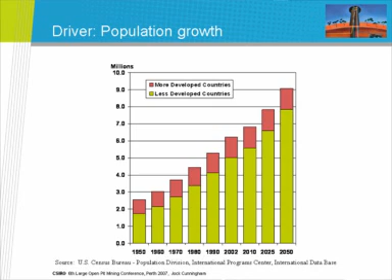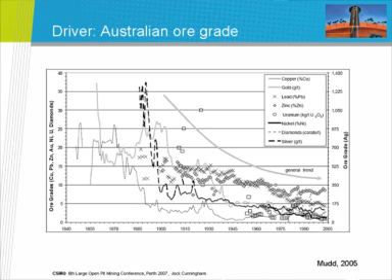Both speakers this morning mentioned some of the drivers for advanced technology and why we need to improve the industry and adopt new technology. Population growth, just putting some data behind some of those suggestions. It's well known out there. Australian minerals production is increasing somewhat exponentially over a long period of time, while at the same time the grade of our ore that we're mining is decreasing. Waste rock is also increasing.

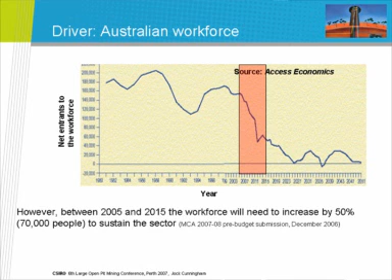And on top of that, the net increase of workers to Australia's workforce is on a gradual decline over years. In fact, somewhere around 2027, maybe we'll start hitting a zero net increase in population growth. According to the Minerals Council of Australia, somewhere between 2005 and 2015, we'll actually need a net increase by 50% in the workforce for the mining industry, equating to about 70,000 people in all.

Safety is another one of those drivers. You can see plotted up on the top left-hand corner there, the lost time injuries is gradually decreasing over time. On the right-hand side, you can see the fatalities decreasing over time as well. Fewer numbers, obviously, of those, which explains the high variation in the rate from year to year.

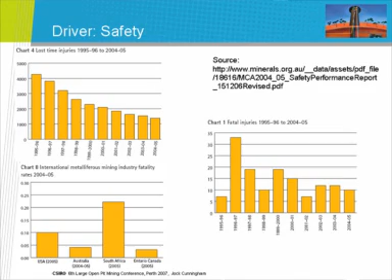Internationally, though, Australia is doing reasonably well. You can see roughly on par with Canada in a global sense. On the other hand, these trends are slowly reaching a plateau, and maybe it'll be very difficult to move beyond that and to improve safety even further without some significant change in the way that we mine.

At the same time, we'll have new challenges. Automated trucks will be introduced over time. Currently operating 5 trucks, Komatsu trucks, the Modular Mining guidance system in Antofagasta in northern Chile. So as discussions are underway and as we think about applying those in Australia, these will bring with it greater safety challenges that we need to respond to.

Fortunately, though, over time, legislation has changed and we've moved towards a risk-managed regulatory environment. This means that we will take lots of care over the introduction of these systems and think very carefully about how we can isolate manual from automated traffic in these situations.

We need to make sure, and I have to be very careful how I say this, but we need to make sure that the introduction of remote control in underground mining doesn't result in injuries and fatalities when we do get around to installing those systems.

With remote control of loaders, for example, this was actually introduced to improve the safety, to stop people getting injured if they took an LHD into an open stope in unsupported ground. We told people to stay away from them. We even suggested perhaps that people stand on a pile of dirt or on a barricade or behind a wall to protect themselves. But these were really procedural type controls, and people were injured and killed, unfortunately, in that introduction.

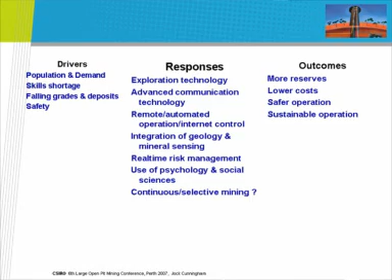One of the other areas that we'll see coming through, in fact it's happening now, is the introduction of other skill sets from other sectors of the industry, and these include perhaps psychology, social sciences, and if we're going to remote control equipment well beyond line of sight, perhaps thousands of kilometres away or around the globe through the internet, then we'll need to address some of the other issues that will be brought to the fore in that process. For example, operators can't see, feel, touch, and the psychologists will help us figure out what types of sensors, what types of input, what types of feedback will be required so that operators can handle that challenge.

Continuous selective mining. Well, this is a question, and we'll come to that a little further on. And of course, the outcomes will be to address some of those drivers that we talked about.

Just looking at the automation response, there has been a recent surge in the desire for automation among the mining industry, however the present focus is to automate and remote control existing operations. This is a type of retrofit. This is now being applied to LHDs, draglines, loaders, trucks, dozers, graders, all sorts of pieces of heavy equipment. Drills, of course, as well, and systems are being developed around the world to improve remote control of drilling, sensing while drilling, blast drilling, and also exploration drilling.

This brings some benefits: smooth and programmed operation of equipment. If something is automated, semi-automated, or operator-assisted, then you can program the operating envelope for the equipment, and it will, short of something going drastically wrong, stay within that operating envelope and reduce maintenance on tyres and equipment damage and all the rest of those sorts of things. Of course, that'll improve safety as well.

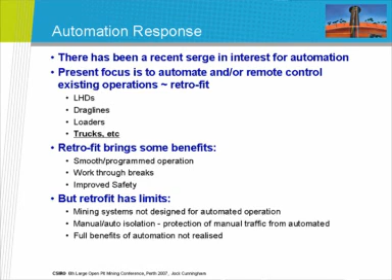But retrofitting has some limits. Mining systems are not designed for automated operation. Manual and automated, people need to be separated from these operations, and at this stage, unless you can protect the whole area, isolate an area, then there are no fail-safe systems to keep operators separate from automated machines. So the full benefit of automation won't be realised, I think, until we can actually automate the complete cycle and integrate a number of these technologies.

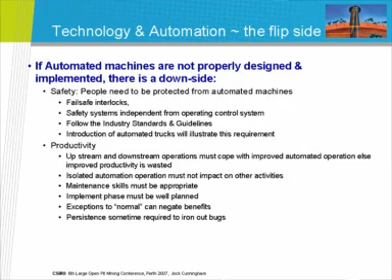We talked about protecting people for safety. A lot of devices out there are really used to guide operators and to remind operators that perhaps there's an issue about to come about. Maybe two pieces of equipment are moving close together. A number of technologies are out there that will constantly search for and detect when they find something. This includes radar, scanning lasers, RF beacons and the like.

But they have a fundamental problem in fail-safeness, because fail-safeness in a practical factory-type automation requires a signal to be received constantly and checked constantly, and when that signal is lost, then an alarm is raised. Some of these other types of technologies, which are probably really the only practical thing to do at the moment, don't fall into that purely fail-safe category. There is a desire out there in the industry, and Rio Tinto's desire has been published.

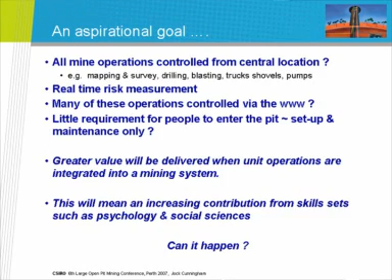They are looking for applying advanced technologies to remote control as much of their operation as they can. It's no secret now, that's out in the news across the industry. Many of these operations can now be controlled by the web, and we've seen examples of that. So what we are seeing now is a greater increase in contribution from a large range of skill sets.

Bob Adam mentioned to me this morning, when he was talking to a colleague of his about in-pit crushing, that apparently the colleague said, gee, open-pit mining's starting to get like longwall operation. And I said, well, strange you should mention that. Recently, over the last couple of years now, automation of longwall operation has been very successful, installed and run for 18 months at one mine at Beltana in New South Wales, now being installed in 2 Queensland mines in various stages of development.

I want to show you this, because firstly it's a very complex environment, very difficult. The electronics, all of the technology, not only does it have to work, it has to be intrinsically safe or enclosed in special housings. But this is an example of a remote control mining method via the internet, provided the mine operators allow researchers to operate the thing from a remote site. And I can assure you they probably won't do that, but it's certainly capable of that type of operation.

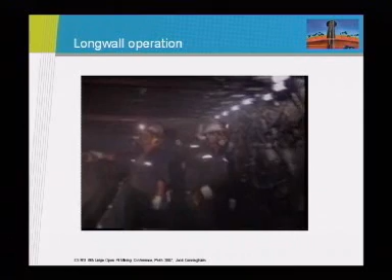It's also an example of geologically guided mining machines, something else we're looking at applying now in the hard rock area. So it's got integrated geology and spatial sensors to provide an intelligent mining system. I'm not sure if you can see it. It's a little bit of a dark image, but that's the way it is underground in a coal mine. But you can see how intense, how crowded and how hazardous underground coal mining can be.

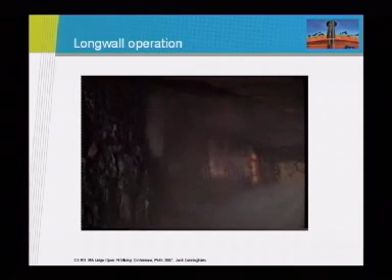You saw a flash of the shearer on one side. You can see the chocks above moving and pushing the shearer and the chain conveyor forward, advancing it through the mine, and while at the same time people are actually walking over those chocks.

On some of the following animations, you'll see a mimic panel, a model of the shearer and the chocks. On the top left-hand side, you'll also see another mimic of an elevation view of the shearer with a lot of sensors on there indicating the state of the machine. And you'll also see a plan view diagrammatically over here, which shows the various chocks and their location and pressures in the chocks.

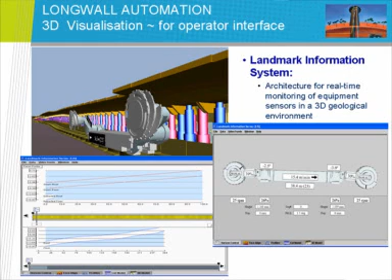One thing to note here is that while this does look like an animation and a model, the model is actually moving synchronously with the real sensors that are located underground in the coal mine. And this is the great advance now in the way that we can automate mining equipment.

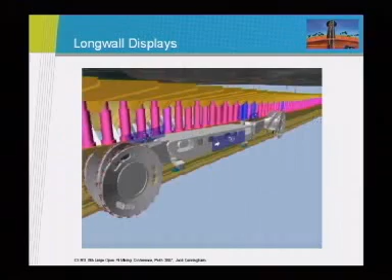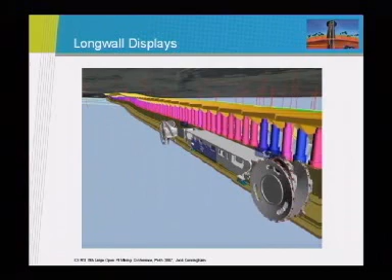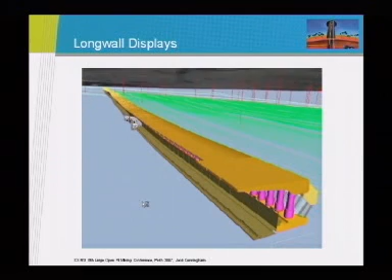So the operator can get multiple types of views. You can watch the operations happening from anywhere in the world via internet communication technology. As I mentioned before, the machine is actually moving synchronously. You can see the colours of the powered supports there, coloured in terms of their pressure. And if you look along the row, you can see how the whole longwall is actually undulating following the seam. You can also look at drill core, drill holes, and other geophysical data superimposed on the mining operation.

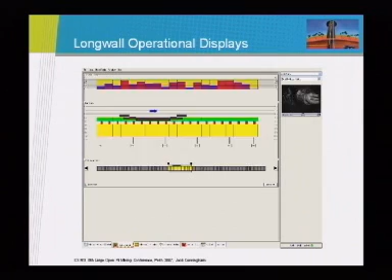Another view, he can look at the shearer, as I mentioned before. He can see the chocks, how they're advancing. He can expand those views and look in great detail at what the operation is doing. I should also add, though, that while this technology is now applied, we haven't actually removed people from the longwall face.

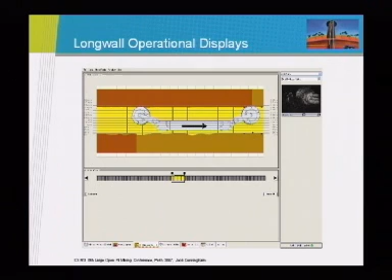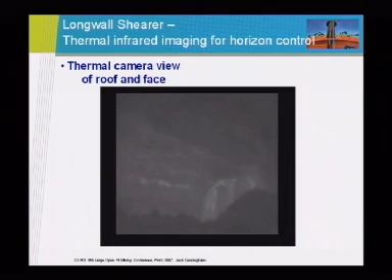With some of the geologically guided sensors that can be introduced, we've looked at how you track the whole mining operation in the coal seam. This is a view of a thermal infrared camera watching the shearer. You can see the shearer cutters rotating here, cutting the coal away. Can you see that? Yeah. And you can see the bright spots really respond to slightly higher temperatures. Now, in some parts of the coal, you can see that the temperature stays there and persists over a period of time.

And this obviously results from a zone of higher friction. That zone of higher friction obviously relates to the type of material being cut. Maybe it's higher clay content, maybe it's rock, maybe it's sandstone. It's unlikely to be coal. So this provides the operator with a view that isn't normally seen with human eyes.

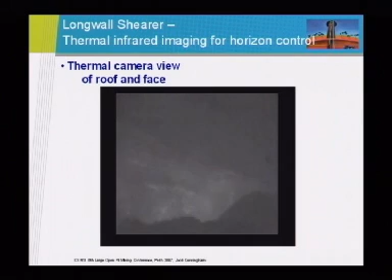One comment I often get from people when we talk about remote control is that the person's no longer there, and the eyes are the best sensors the world has. And that's quite true, but along the same lines, we can develop sensors that look beyond the electromagnetic range that the eyes are sensitive to. We can look in the ultraviolet and the infrared and see things that the eyes can't see.

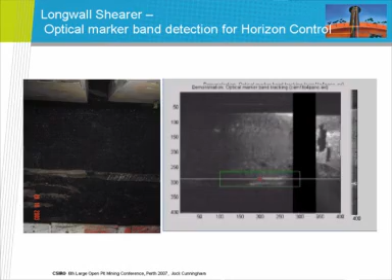This is an example of looking at a clay marker band in the coal seam. Cameras can track that seam, and they can use that piece of information to guide the whole longwall operation to make sure that it stays within the seam. So those are examples of some advanced remote control and the use of geology to guide mining machines.

What about hard rock cutting? Wouldn't it be nice if we could cut hard rock of 100 to 160 MPa type rock strength using cutting methods? Well, a number of researchers are working on this problem, and over the course of time, no doubt we'll see rock cutters being used in open cut mining, and that might open up opportunities that we haven't yet thought about for selective mining, for example.

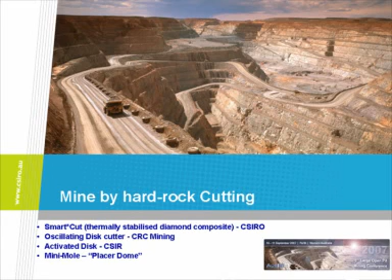A number of developments around the world. There's a Smartcut technology being looked at by CSIRO, oscillating disc cutter by CRC Mining, activated disc, and I must admit I haven't checked whether they're still doing this, by the CSIR in South Africa. And of course the Mini-Mole program, now put in abeyance, from the Placer Dome group.

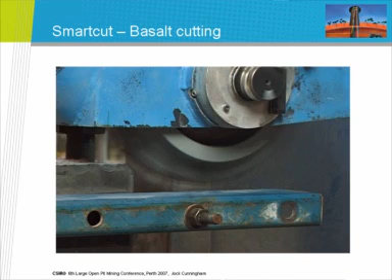Quick shot here of some Smartcut technology actually cutting basalt. So we can see, at least in a very rigid, fixed laboratory environment, that cutting hard rock is emerging as a possibility.

Now, if that were to happen, then we can have machines, certainly in the iron ore area, perhaps a planing machine that can do selective mining, plane, cut rock, produce sizes that perhaps bypass the AG mills and the SAG mills, do a number of the processing operations while actually mining. That also then allows you to sort ore while it's happening and minimise the carryback of waste.

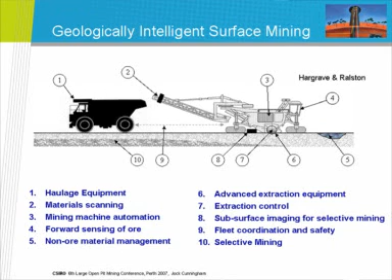This is an example where you might have a truck following a planing machine, and I know these are now being trialled and looked at in the iron ore industry, starting to produce a farming type operation in the mining area. We'll be able to sense the changing geology ahead of the machine, also after the machine. We can control cutters, we can sort on the conveyor belt, for example, if we need to, and produce a continuous mining operation.

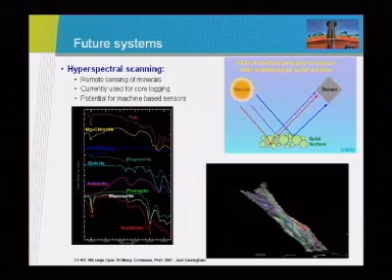Some of the sensors that we might need: we've looked at hyperspectral scanning, and this type of technology is now being rolled out in core logging examples. The hyperspectral electromagnetic reflectance from terrains. Each type of mineral has a different spectrum, and you can use that to colour a mining face sensitive to the mineral content, and then of course overlay that perhaps onto a photogrammetry image of the same material.

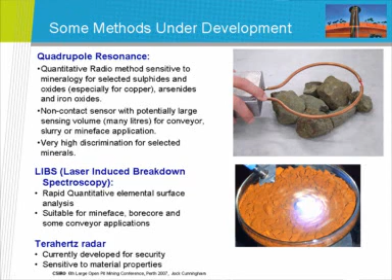A bunch of other sensors are being looked at, quadrupole resonance techniques, especially for copper, laser-induced breakdown spectroscopy. These are all remote sensor technologies that might in the future be applied to mining machines. Terahertz radar, currently being developed for security. It sees through clothes, can tell the difference between cotton and silk, for example, and find contraband on people coming in through immigration. We're going to be looking at how that can be used in mining for downholes and also for open cut areas.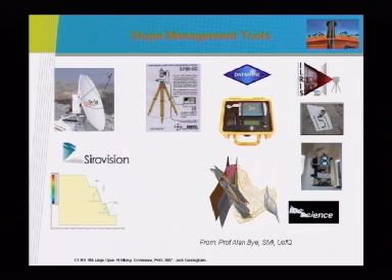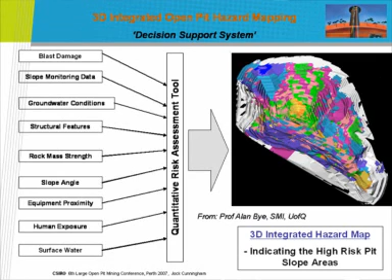I've produced these slides here with the permission, and I'm very grateful, of Professor Alan Bye of the SMI, University of Queensland, who has proposed this concept of integrating a whole range of technologies into a real-time risk assessment process. Includes GroundProbe and Sirovision, a whole bunch of survey type applications. And one of the issues is that all of these are developed in isolation. They're all optimised in isolation, and perhaps it's now time to try and integrate all of these things into a risk management algorithm.

One of those algorithms may be a new system that's come on board and developed again in the coal industry called Nexus. This is a real-time risk management system where a bunch of sensors are used to inform the software about conditions underground, and there's a rule engine or a program in there that uses those sensors to assess what the likelihood of, in this case, explosions might be.

So, just looking very quickly at some of the other automated processes that are happening in the open cut domain. These are emerging, these are still in a research area, but over the fullness of time we might see them being employed in open cut mining. Dragline assist. Okay, I know draglines are not used in metalliferous mining, but every now and again mining consultants, or mining companies' internal advisors, talk about the prospect perhaps of using draglines in an open cut metalliferous mine. This technology is now automated.

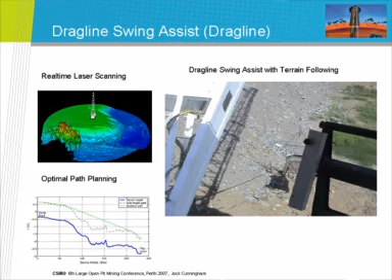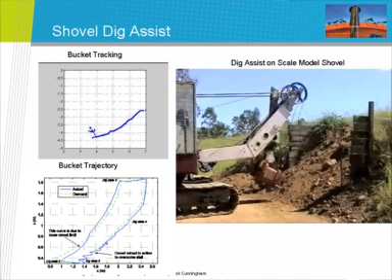It has been trialled, not fully adopted yet in the coal industry, but it comes with the capability of mapping the terrain as you mine and keeping good track of the whole process. Trials indicate that the automation system is almost as efficient as operators, but it is stable in its performance throughout the shift.

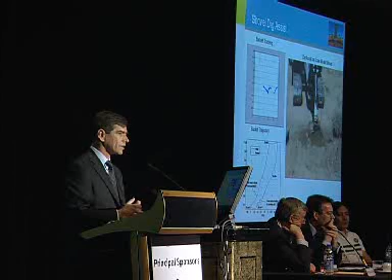Another technology being developed is to operate shovels, automate the dig process, make sure that the digging is occurring inside the appropriate envelope for the machine. You can scan the bucket, sense that it's full, and you can look at the profile trajectory here. You can see as the bucket's being crowded and loaded, it's lifted up, it swings, comes back and dumps. This technology has now been proven in a small scale setup as you can see there on the screen.

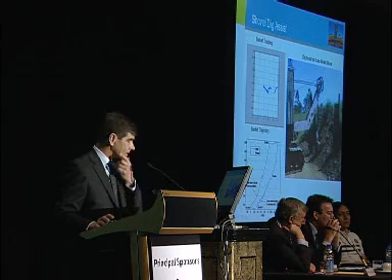Once again, automated loading is also possible, and traffic management in a close environment is also possible. So you can see that not only can the shovel be loaded, but it can also swing and dump and identify a truck at the same time. You can see here a laser scan of the truck. The truck's scanned, the load can be assessed, and it can be decided where the next bucket is dropped.

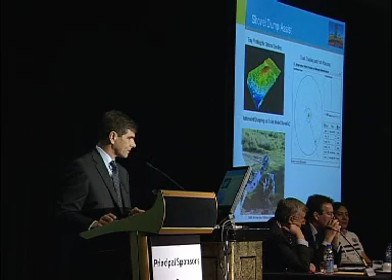Over on this side you can see a truck approaching. This is like an aircraft traffic management situation. You can see the shovel over here, and you can see the truck being tracked and located throughout the cycle. This means that the close and fine detail of the scheduling and precise positioning of trucks with respect to shovels can also happen at the same time.

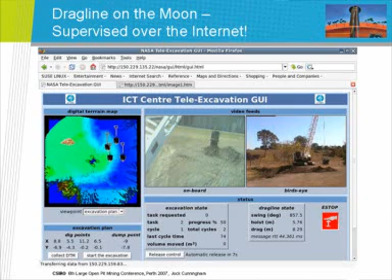Looking at something different, strangely enough, some of my colleagues are looking at, in collaboration with other researchers, how to mine on the moon. And I mentioned before that the internet produces lots of good data transfer, but it's not designed for automation. And one of the reasons it's not designed for automation is that it exhibits a lot of variable delays, and that can be very difficult for remote controlling operations.

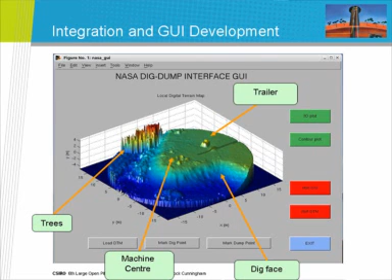Well, there's no more variable delay than communication up to the moon or Mars, so there's a trial research program to see how mining equipment can be remote controlled, operator assisted, with long and variable delays. So there's a NASA project which is looking at operating large mining equipment, and in this case it was operated from the US with test mining equipment in Brisbane, and that was operating very successfully.

So, in conclusion, where are we going? We're going to see a lot more introduction of equipment retrofitted in terms of automation. Once again, what's being looked at the moment is retrofitted technology like this in isolation, not as a systems approach, not as a systems view. And I think greater benefits will be obtained when we start to combine all of these individual operations into a proper system.

Research now into positioning of mining equipment, scheduling, dispatching is well under control by at least two major suppliers of this type of technology. That's now falling into the domain that you can buy these things off the shelf.

And the research effort probably is more of an industrial research effort to adapt particular technologies into a mining operation and perhaps to change the way that the operation is otherwise undertaken. Many of the component technologies are available, and the communications networks will continue to rapidly improve over time, and we don't really need to worry too much about that. The other industry sectors are doing a pretty good job of developing that type of technology.

What they're not looking at, though, is the particular issues of mining equipment, how we develop new mining equipment, how we look at new mining processes. This is still within the domain of the mining industry, and no one else is going to undertake that research apart from the industry itself. We're going to see a lot more contribution of skill sets other than electrical, mechatronic, mechanical, mining engineering, and these will come from the psychology and social type sciences.

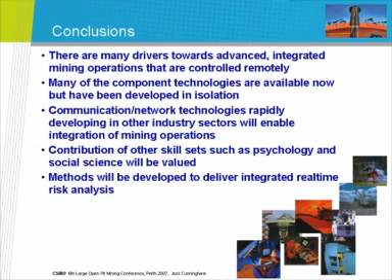This is now being applied, for example, in telemedicine, where surgeons can, for example, live in the Blue Mountains and undertake operations on a patient based in Sydney. These technologies are now available. How they get into the mining industry is worthy of a great deal of effort in terms of research. And this will make remote control and automation of distant remote mining equipment a lot easier and a lot more achievable. So I offer those suggestions as someone who is not an expert in open cut mining, and open the floor to questions. I think that is the program, Bob?

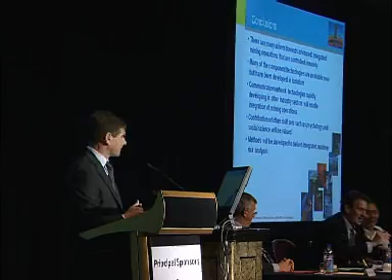Thank you. Jock, I wonder if you could just give me your thoughts on whether you think the mining industry is spending enough money on research into these new types of technologies. Yeah, thanks, Nick. And I didn't ask him to ask that question, but look, perhaps embarrassingly, I can't quote you the figure that companies spend on research, and often they're a bit hard to believe anyway, because a lot of companies do research, and sometimes they don't even realise they're actually doing research.

So you know, I think obviously you'd expect me as a researcher to say no, not enough money is being spent, but I might just add that there is a difficult threshold which perhaps we in Australia are not very good at crossing compared with other countries, and this threshold might be at a point of taking an idea which has no track record, which has no demonstration sites, taking it over that threshold into mining trials.

And I know of a number of projects now that perhaps are a little bit way out, a little bit controversial, a little bit far-fetched, and it's very difficult to cross the threshold of faith to gain funding at that point. So maybe what we're missing out on is that zone of research that requires more speculative type funding. Once something is demonstrated and shows some potential for improving the industry, then mining companies in the large, especially during these boom times, find it easier to justify spending research in that application phase.